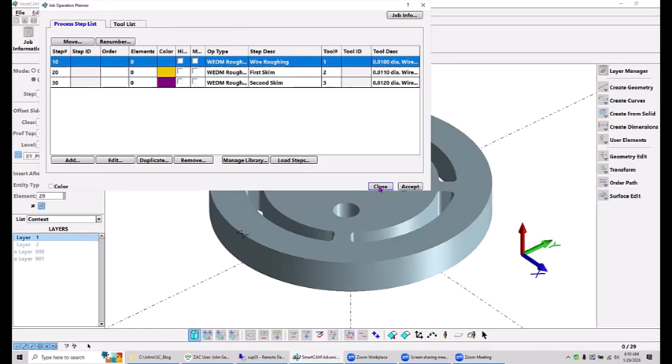We can look at our planner, and we're going to rough all of the holes and the perimeter. Then we're going to do 2 skim passes around the outside of the part. And then at the end, we'll create some code. So let's start with first. Wire is not a solid modeling CAM solution, but we can extract things from solid models. And we're going to start by extracting the wireframe from this model.

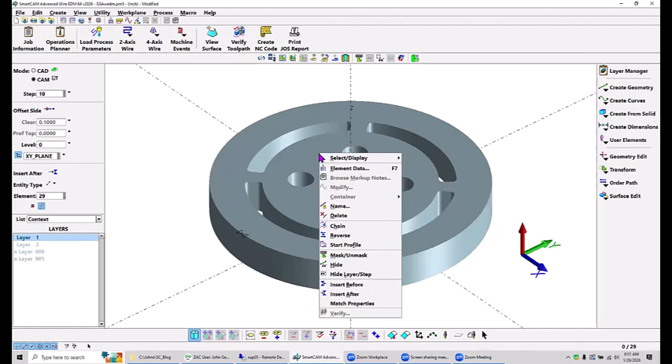First thing we have to do is to figure out how thick this part is, and I can right-click this top surface of the solid model and select element data. And then we can see that it's a 1/4 inch thick. Let's get our wireframe, and we'll stick it on a CAD layer, which is good for input geometry, which is what we'll use it for, but it's also good for fixtures and text, notes, and that sort of thing.

Let's do it on an unused layer. If we look in the list, we can see that layer 3 is unused, so let's pick layer 3. We've already determined that the thickness is a 1/4 inch, so let's turn on profile top, and we'll enter in 1/4 inch. Now what we're going to do is we're going to slice a piece of geometry from the solid model and put it on layer 3.

Well, we can do that under create from solid slice. I like using the toolbars, so I'm going to create from solid slice, and we can pick any surface on the solid. So I'll pick just the top surface. We want our Z level to be at 0. So that's what this is. The Z level is at 0, and the prof top will be a 1/4 inch.

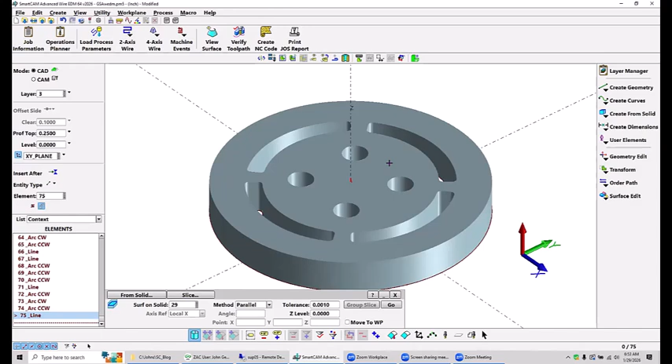So if we just hit go, if you watch this edge, you'll see that it appears. So we've got some wireframe geometry, and it also shows up in the list here. So let's go ahead and hide our solid model now. So I can right-click anywhere on the solid model and then hide layer step. And there's our wireframe geometry. Let's go ahead and get a top view. So I'm going to go to my view bar and get a top view.

And we've already determined that our start holes are in the center of each of the slots and in the dead center of each of the round holes. I guess the first thing we need to do is to make sure that everything is going in the right direction, for instance. So I can right-click out in the G view and select all. I can also use the group toolbar and select all here. And then by default, we have the color and arrows set up for what grouped elements look like.

And we can see that the outer profile is going clockwise, which would mean the offset for the toolpath would be on the left. The inner profiles, so the offset would be on the left on all of the inner profiles. Looks like all of them. So Slice did a pretty good job there. But let's say that we wanted to make our offset right on everything. While we have everything in the active group, we can go to order path. We can use group direction.

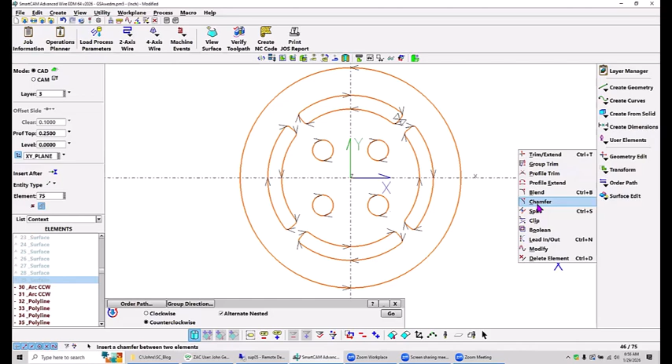And let's set up our panel to where it's an element division. And we're going to do 50% of the part, and we'll make a 0 gap width. Then we can start picking elements. Note that the asterisk shows up on element when I click that field. That means as soon as I pick an element, it's going to do its thing.

So if I come up and I click this element, you can see that it split the two. So now we've got a little arrow on either side. So let's go ahead and do that on the others. And we don't need to do really anything on the round holes, because we'll just start in the center of the round hole, and then it'll go to wherever the start is on the round hole.

Anyway. Okay, so we've split these, but we haven't made this element or this element or this one or this one the start of the profile. So we need to make the first element the start of the profile. If we were to do a right-click element data, we would want to see this top line right here say start prof.

So let's go ahead. A couple of ways of doing this. We can right-click this element and make it the start prof. And actually, you can see the bow tie because we're at the end of the database. The bow tie here shows that that's the start end of the profile. We can also right-click element data, and now it shows that it's the start of the profile.

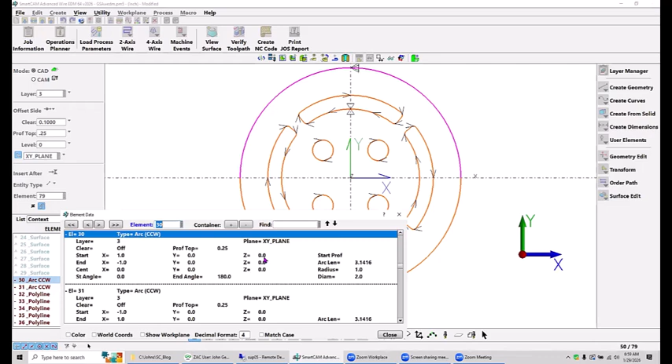Okay, so now you need to change all of this to toolpath. Like I said, everything will be offset to the right. The level, I'm going to right-click element data, any one of the elements, and we can see that the profile top is 1/4 inch, the level Z0. So we're looking good there. The only thing is that it's layer geometry.

So let's go to Edit, Property Change, Toolpath. I like using the icon, the button bar, toolbar. And we'll change this to toolpath, and we're going to use our first step, which is the roughing step, step 10. Our offset will be right.

And we don't need to do anything else on this. NC means no change, so we're not changing anything on the clear or the prof top. The level stays where it's at, and all of that. So now we hit accept. Let's get an ISO view of this. And then let's do a verify toolpath. Let's slow this down just a little.

I'm going to turn on the stock. This is the toggle stock button. And you can see the start holes are all modeled in here. We have no lead ins yet. We're going to get there. So you'll notice that the wire just starts in the middle of the material.

But let's take a look. So, oh, it's cutting the outside first. That's not good. Then it does the round holes. Then it does the slots starting in the middle like we wanted.

Okay, so we need to change the order. Let's do that first. Let's change the order of the toolpath. We want the outside cut last. So we'll get a top view. Then let's do a select none, so I can go out in the G view, the graphics view, and select none. You can also use it on the group toolbar.

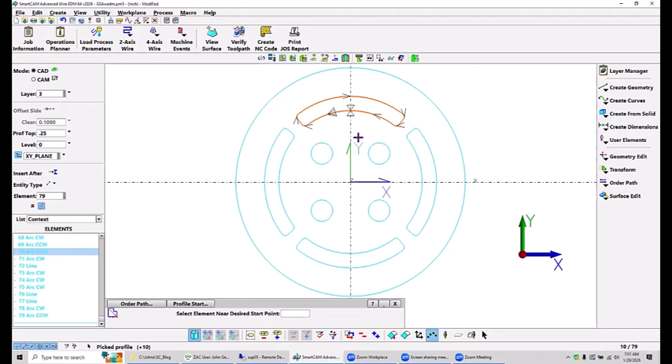But let's pick these profiles in the order that we want them cut. And this time I'm going to use my profile picker. I'm going to turn that on and I'm going to pick the profiles in the order that I want them cut. So I'm going to start with this one. So the profile picker picks the entire profile. And then I'll pick this one, and on around in some sort of a logical order. And the outer profile.

So now I can go to order path, and that'll be under edit, order path. I like using the toolbar. And then we're going to use sequence move. So we're going to move the sequence of things. So under sequence move, we have an option of by group selection sequence. So I want it to move the things around so that it's put in the order that I picked them.

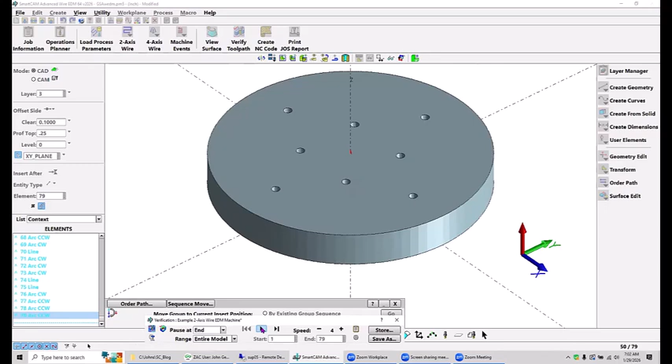So if I hit go now, and then we go back to the ISO view, and then verify. And when I hit play, you'll see that it does it in the order that I asked.

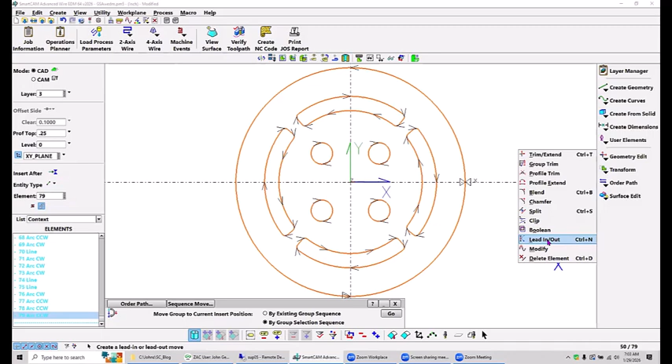Okay, so now let's put our leads. Go back to a top view. So the start holes for the slots are in the dead center of the slots, and the start holes for the round holes are in the dead center of the round holes. So let's go ahead and go to geometry edit, lead in and out. And for the slots, let's do

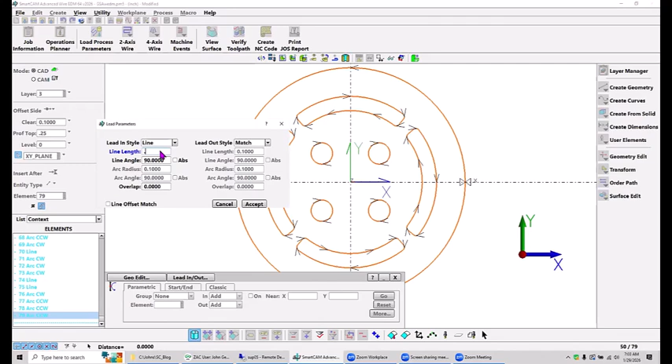under more, first let's determine what the width of these slots are. And I can go to utility, measure. And then if I pick the end point of that, the center point of that, I can see that it's 1/8 inch, so we want 0.0625. So if I go to more, then I can make the line length 0.0625, and it'll be a 90-degree off of wherever it's going to start. We'll do the lead out, we'll match whatever the lead in was, so that's good.

So now I can pick an element and then hit go. And you can see the lead in now is at the very center of that slot. I'll zoom in a little bit. You can see the lead in will now be there. So let's go ahead and do that to the other slots. This isn't changing the order, just adding the lead in. So I pick that element. I can see that element. And you could actually pick any element in the profile. Okay, so now we've got the slots done.

So let's go to classic for the round holes. We'll turn on a reference point, and then the reference point we want, let's say for this one, will be X minus 0.25, and the Y is 0.25, and then we'll pick the element here, and then it sticks the lead in from the center of the hole. Because the minus quarter inch and quarter inch is the dead center of the holes.

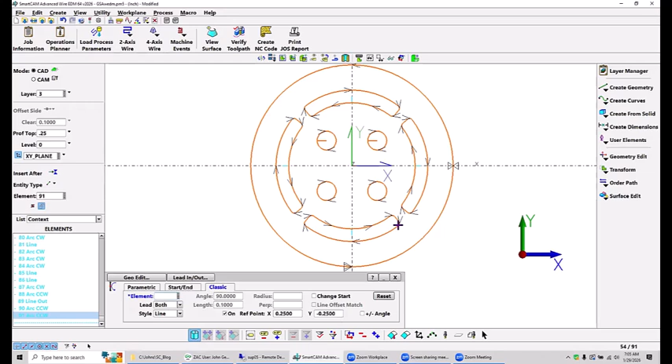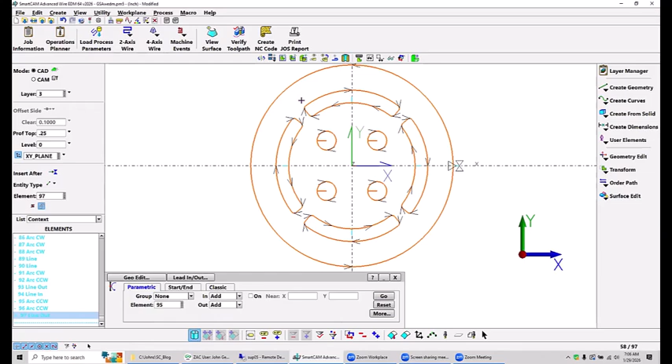So now we can change the X to quarter inch. And pick that hole. Change this to minus quarter inch. That hole, minus quarter inch. That'll be that hole. Now we can go back to parametric, and let's just pick the outer profile. This time we're going to hit go, and it puts our profile there. So let's go ahead and verify this.

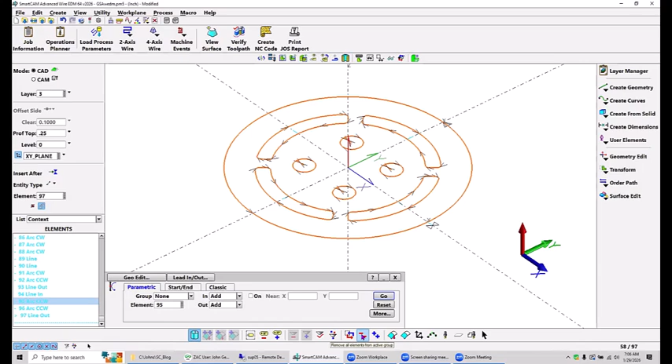Okay, so let's go ahead and stick some skim passes on this. So I'm going to do a select none. You can right click out here and select none, or you can use the group toolbar. And then let's put the outer profile in the active group. Remember, we're going to stick 2 skim passes on. So we'll have the rough, and then 2 skim passes. So under 2-axis wire, we have skim cuts.

Okay, so our roughing step was already step 10. So the first step of the skim cuts will be step 20. And then the second step of the skim cuts will be step 30. And then we'll hit go. And then let's verify that.

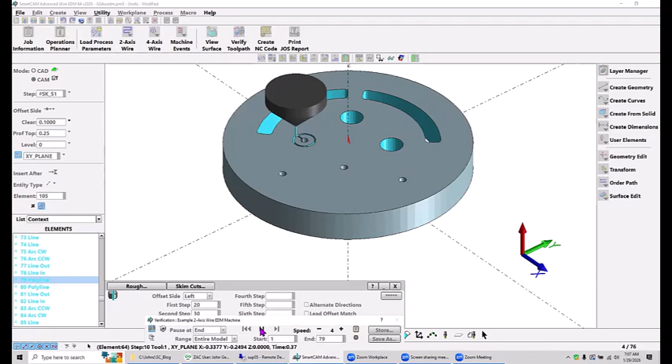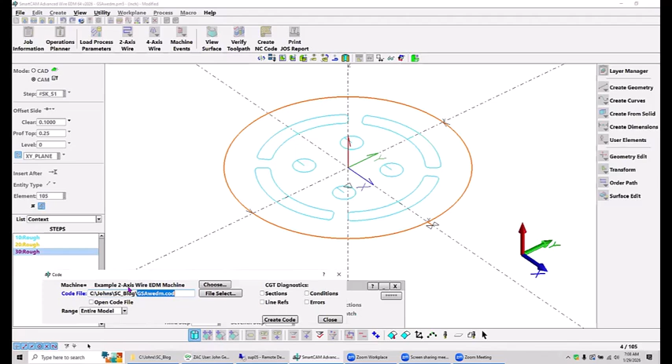There it is. Okay, so let's go ahead and create some code for this. So if we go to create NC code, on the dialog, the machine is not undefined. That means that we have a machine set up. And I'm just going to pick the default name here. I'm going to open the code file just so we can look at it before we end this video. And create code. And then there's the code file.